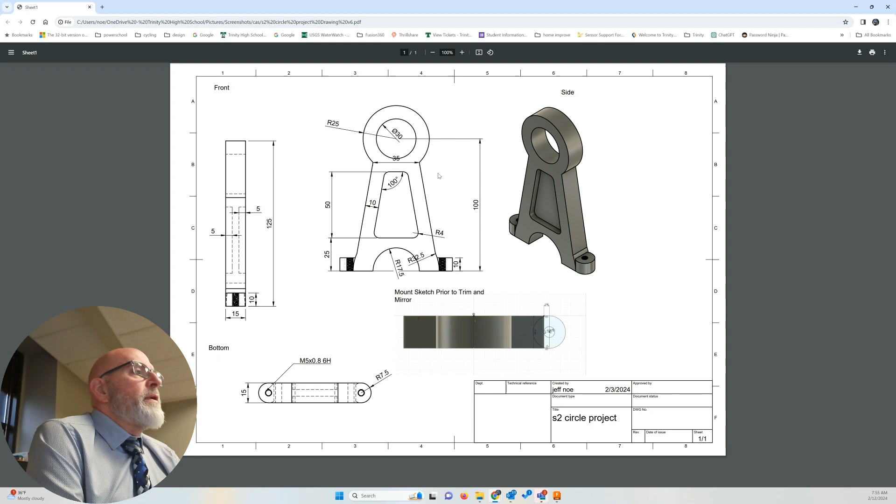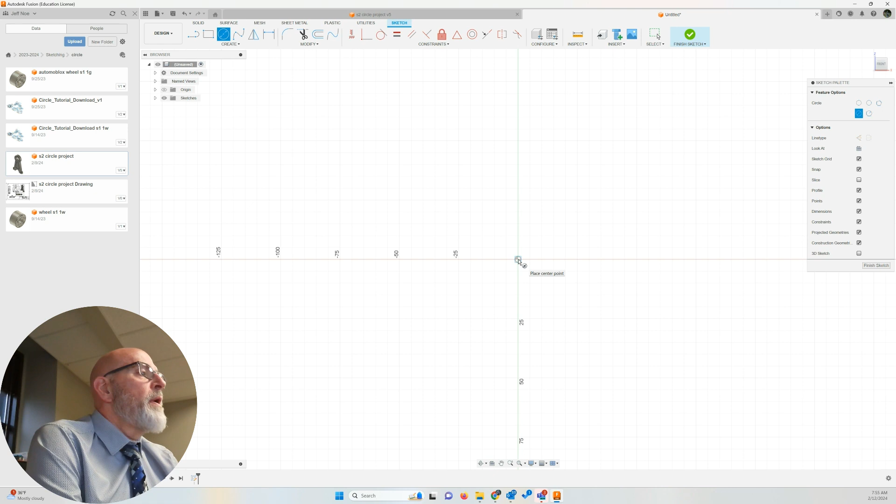All right, let's go ahead and get started. Move this over. Let's create a new canvas and create sketch, front back plane. So the XZ, here we are. Let's draw our 2 bottom circles. Create circle, center diameter circle. There's the keyboard shortcut of C. Click on the center. My first circle is 17.5 in radius, so it's going to be 35 millimeters. Enter. My second circle has a radius of 32.5, which will be a 65 millimeter circle. There's my two circles.

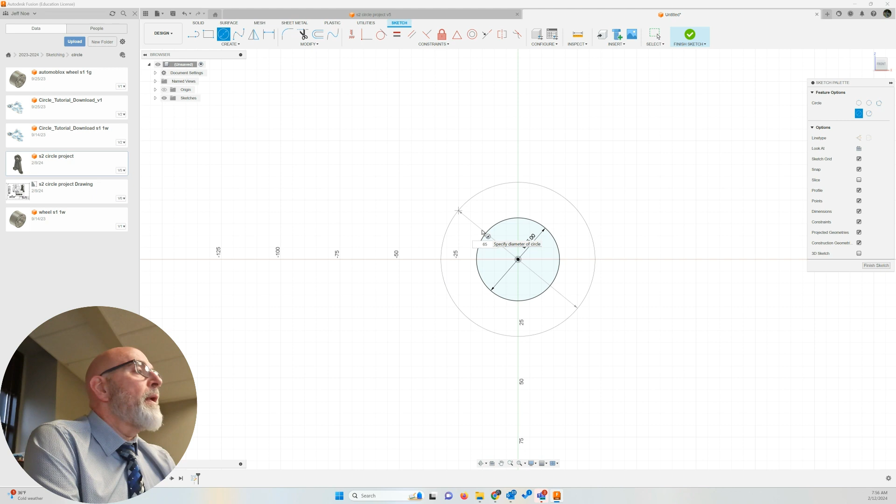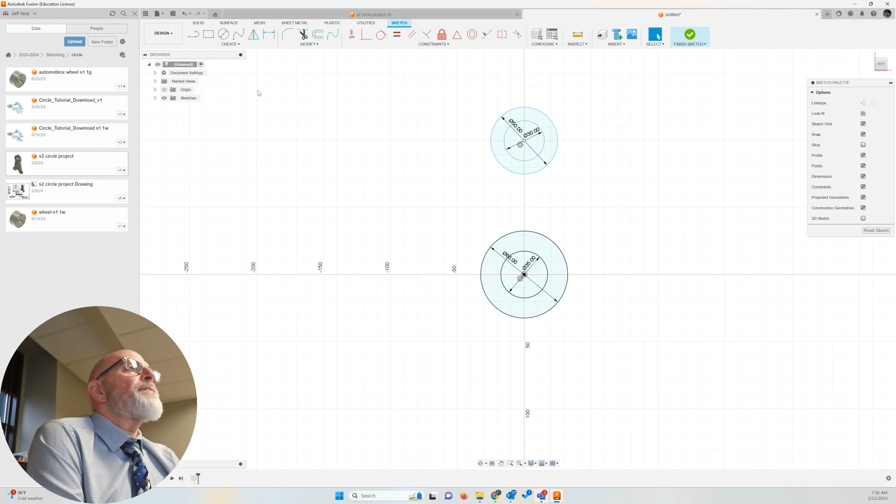Above it, let's draw our next two circles. I'm going to just spot right here. The inner circle has a diameter of 30 millimeters. The outer circle, 50. Okay, now let's position these two circles. First thing I want to do is make the relationship vertical. So I've opened constraints, horizontal/vertical constraint, the center point of this pair of circles to the center point of this pair of circles, and they are now aligned. I'm going to escape out of that tool.

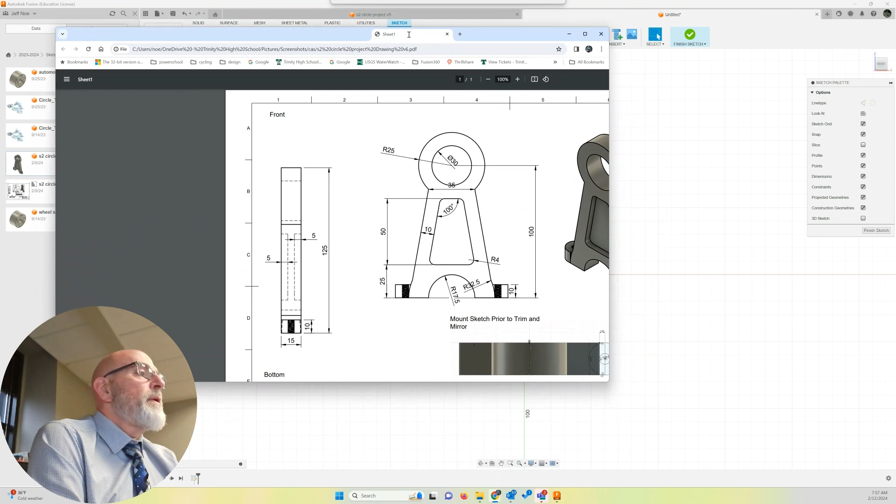I want to dimension these two circles. They're going to be 100 millimeters apart. Okay, so there's to here, 100 millimeters.

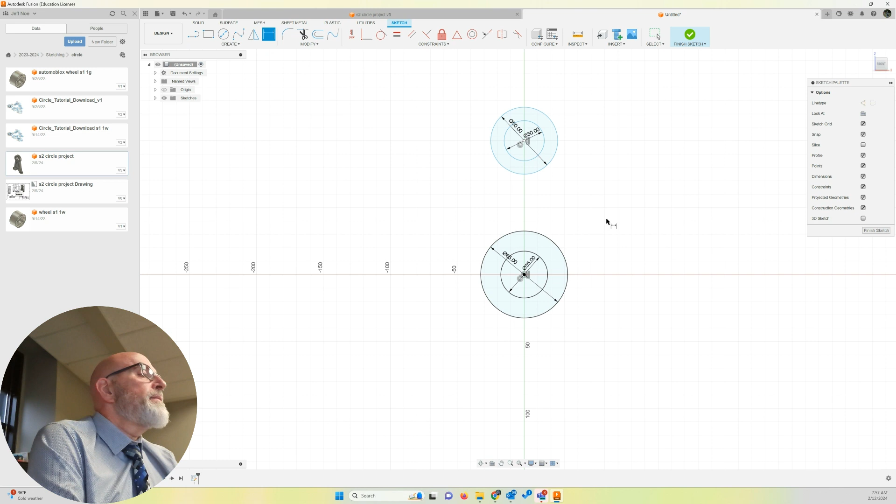Sketch dimension tool, create sketch dimension. Here's the shortcut. All right, center of that circle, center of this circle, so a pair of circles. I just happen to put it on 100. And there we are.

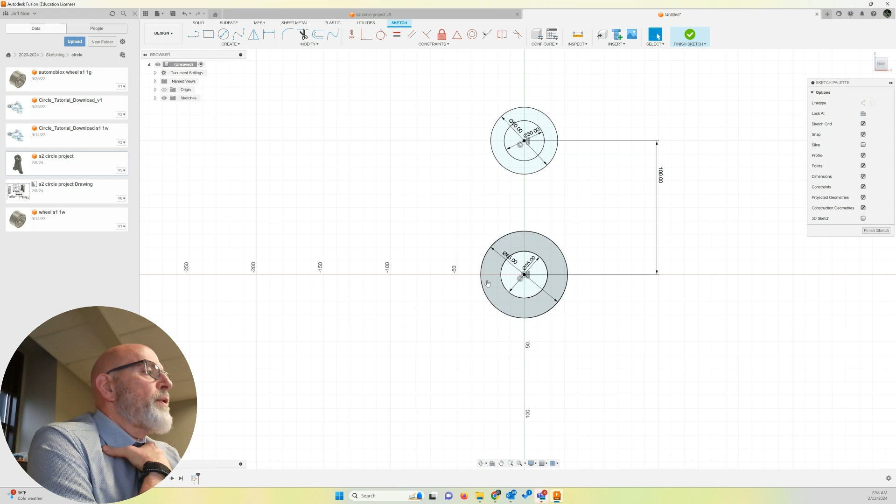All right, now we don't need this full circle here. Like I said, later I'll expect you to use the center arc to create these shapes, but we're going to draw a line across the bottom. So let's take our line tool. Let's find where we are on the axis.

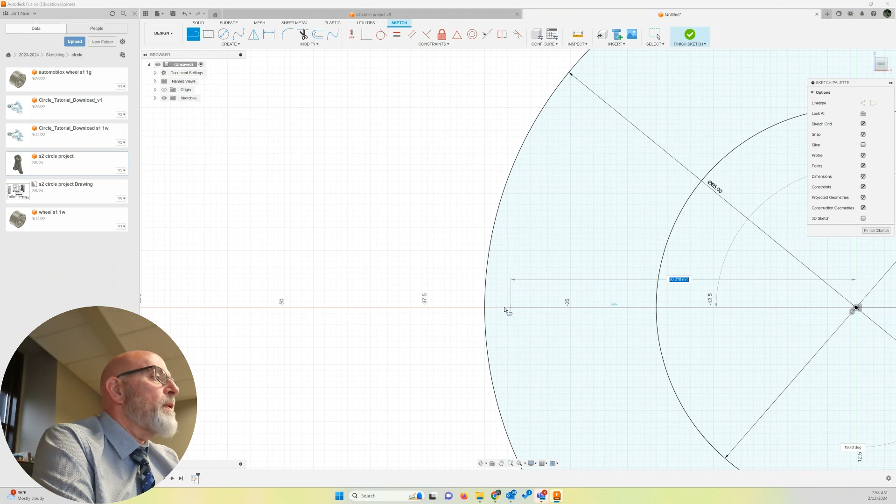Okay, we could just start at the origin, come straight across. There we are. There's the line tool going that way. Move my design over. Line tool again. 0 degrees. There we are. Escape. So now I have this enclosed shape. I also have this enclosed shape. And down here, don't need them.

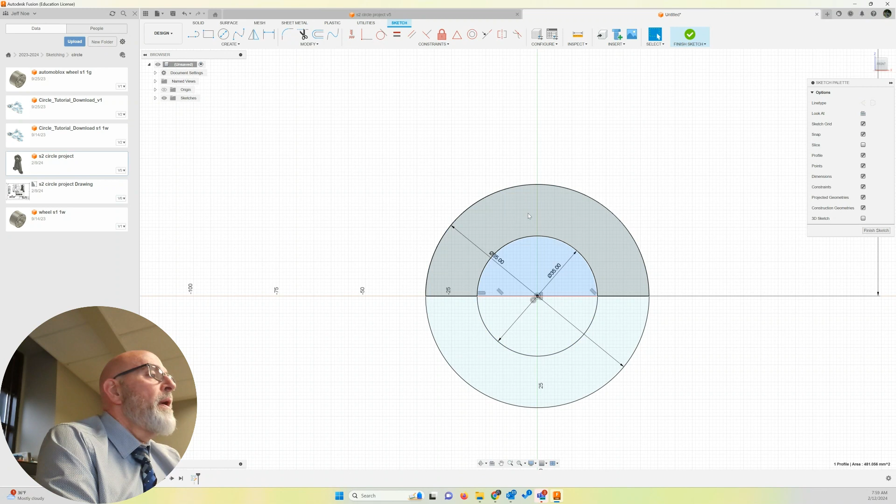Let's trim them away. So modify, trim. Let's start removing these lines. I don't need these interior lines. And now I have one enclosed shape down there.

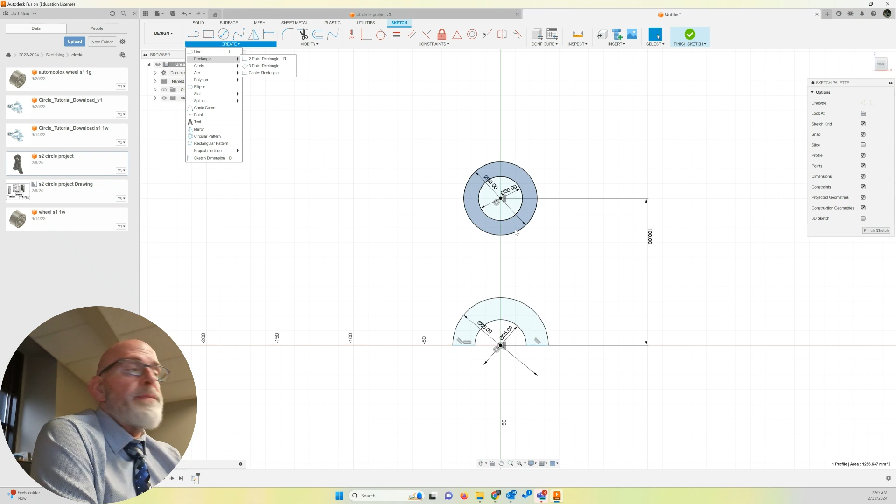Okay, the next item, we need to draw lines connecting our two pairs of enclosed shapes here. Now we know this line starts where the circle is 35 millimeters apart. A couple ways that are easy to determine this. I could go create rectangle, center rectangle. From the center of my design, draw a rectangle that is 35 millimeters wide. Okay, and where it intersects the circle would be the starting point for my lines going down.

I could also just simply take a line, draw a line, line tool. So I'm on the edge of the circle. Okay, get the blue X, click. I'm going to come straight across at 180 degrees. There I am on the other edge of the circle. So I've tied my line to the edges of the circle.

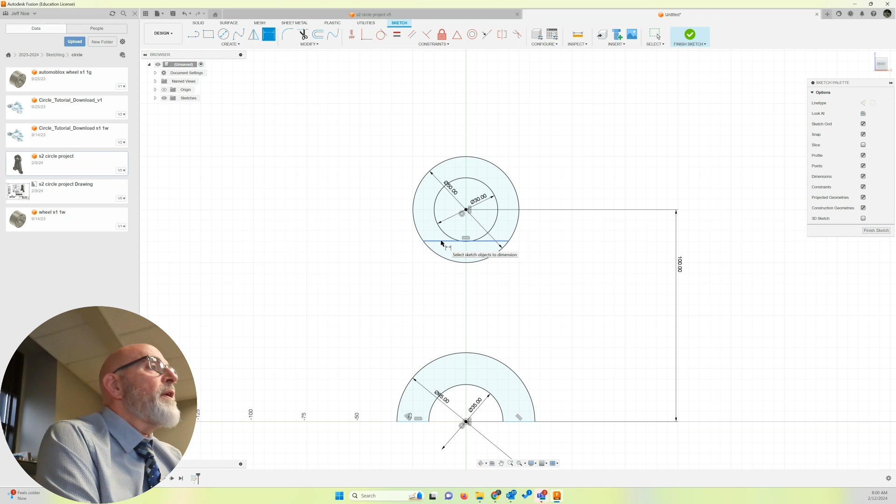Okay, one of the reasons I put the vertical constraints on the two circles is because this circle will have a tendency to move as I go set a dimension to this circle. So if I select that, create sketch dimension, if I create a dimension for this line, there it is, it's at 30, a little over 30 now. Let's set it to 35. It comes down along the circle where it's touching each edge, connected to each edge of the circle at 35 millimeters.

Because I got that blue X, started my line on the edge of the circle, Fusion is assuming I want to stay on the edge of the circle. I set the dimension of the line to be 35 millimeters, so it moves the line down where it's 35 millimeters across. If you don't have these vertical constraints in place, often this circle just moves to the right, messing up my design.

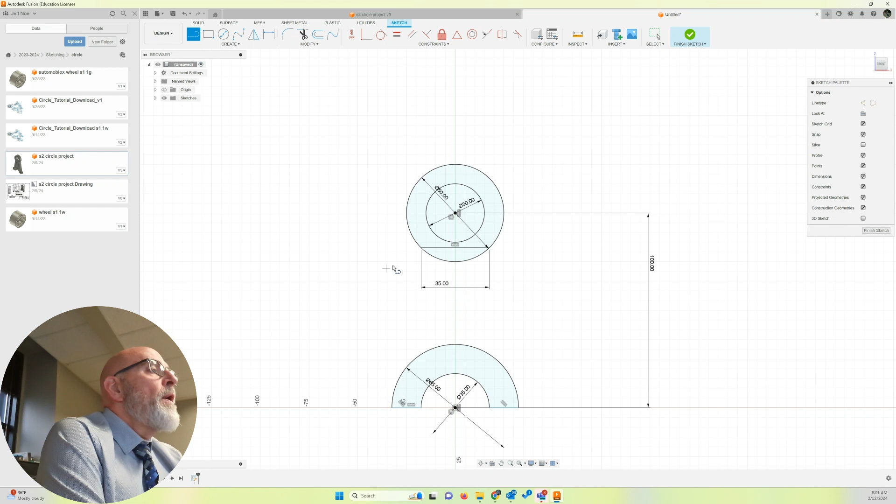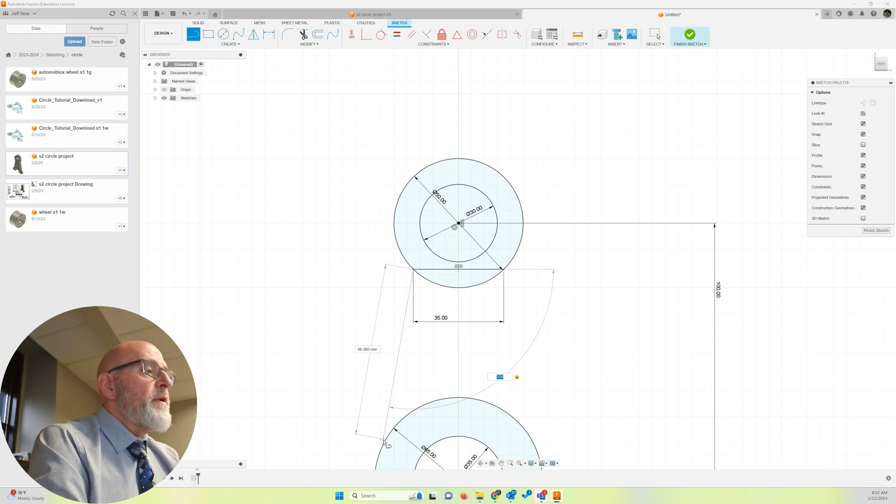All right, so let's open the line tool again, create line, there's my intersection with my 35 millimeter line on the edge of my circle, click. I'm going to start down. I'm going to tab to my degrees, set it to be 100, and I'm just going to come straight down till I make contact. There's blue X. I've made contact with the bottom arc, and there it is. I'm going to do the same thing on the other side.

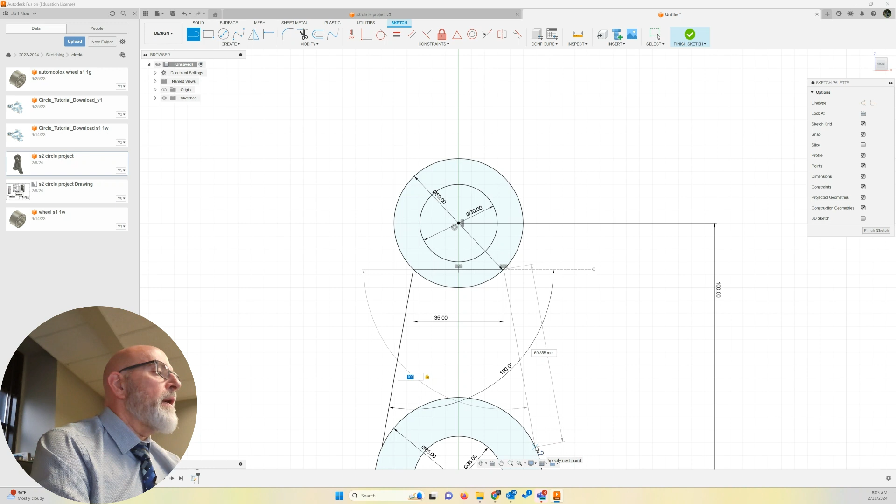Line tool, there's where they join, click, tab to my degrees, 100. Hold on, get this right. There we go. There's my blue X. Click, escape. Okay, so my shape is starting to take form.

Let's get rid of this interior line here. So let's trim it away, modify, trim. I remove that line. Let's go ahead and remove that line. Close the tool, modify, trim.

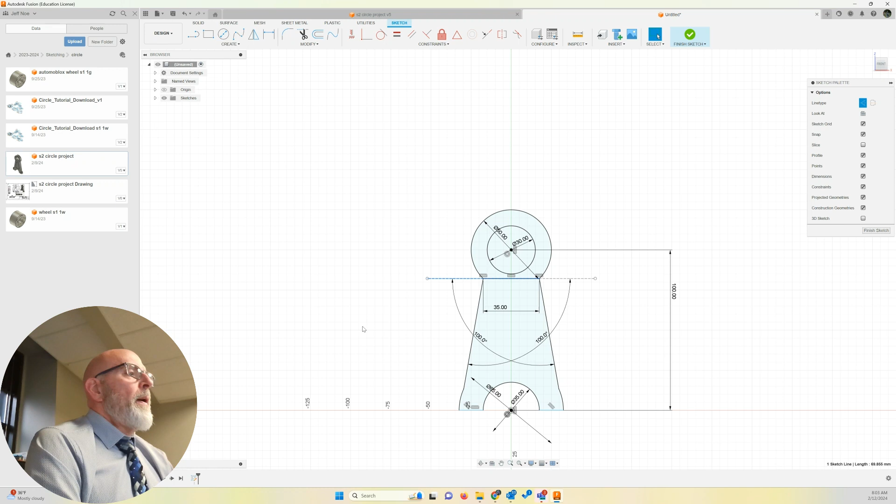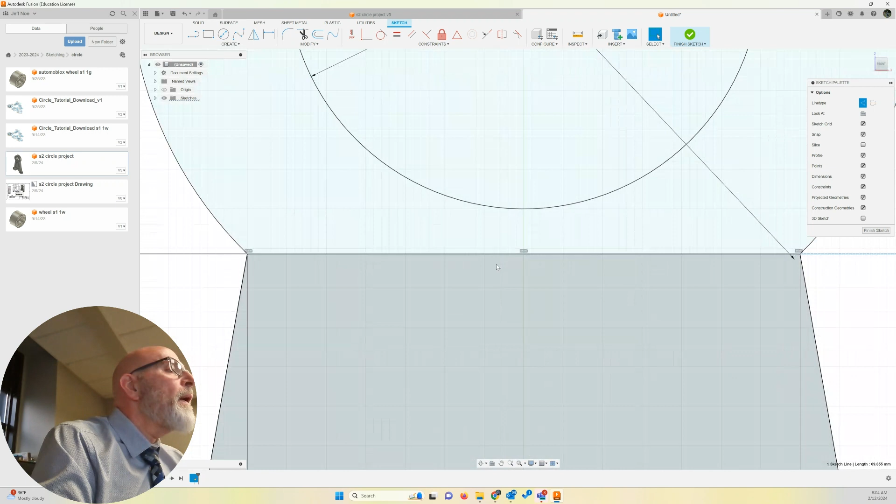Now, that line is part of my design. I don't really want that part of my design. I should have drawn a construction line. It's not a problem. I've selected the line, okay. I'm going to hit letter X on the keyboard. Not select. There it goes. I must have not had it selected. Not sure what I was doing, but there we are. We now have our enclosed shape.

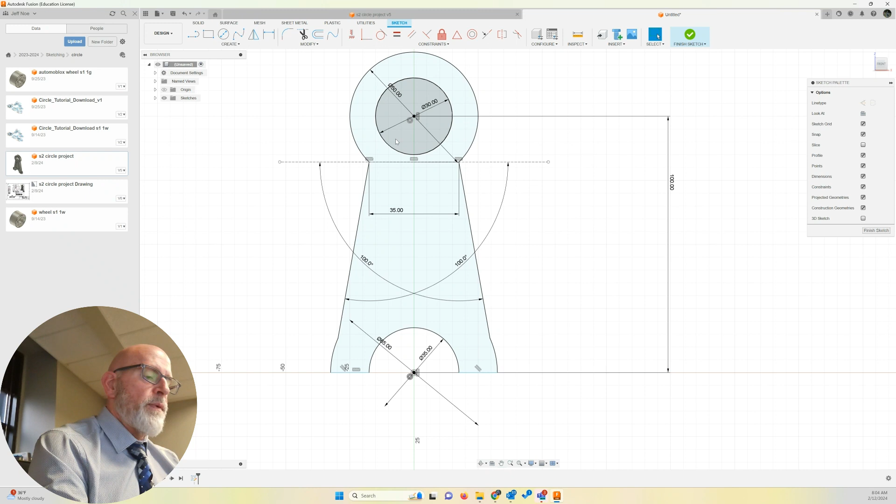I'm going to extrude it, so you can finish sketch and open extrude, or you can just hit the keyboard letter E for extrude. It finished the sketch for me. Select my profile. Change it to the home position. We are going to extrude 15 millimeters and click OK.